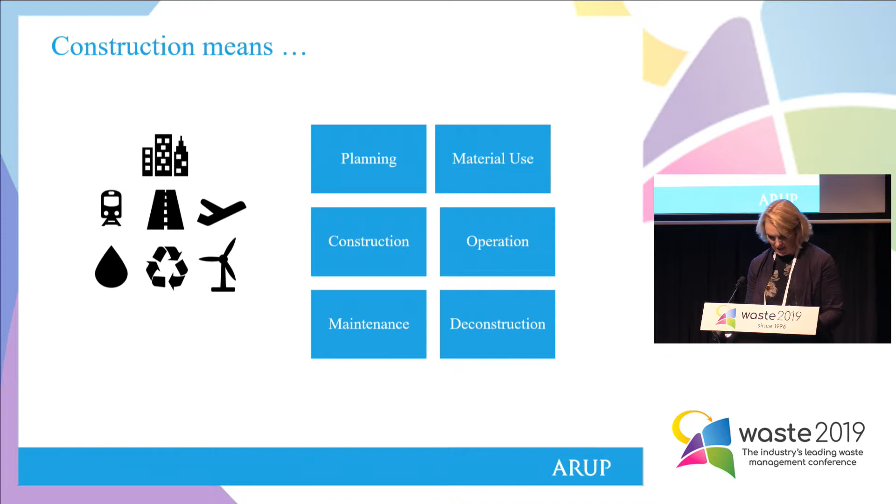This next slide comes from a report that Arup produced with the MacArthur Foundation. When we think about the take, make, dispose approach, it results in the construction sector being one of the largest consumers of resources and raw materials in the world, and a major producer of waste and carbon emissions.

Some key reference figures for the built environment: 10 to 15% of all materials are wasted during construction, and I think that's a conservative figure. We don't use about 40% of our office space, so we have huge wastage within buildings themselves. We could be conserving so much more energy if we thought about smart usage of buildings. Globally, only about 54% of demolition materials are landfilled, and a huge amount go to landfill.

We saw this morning the figures for construction and demolition waste across Australia. It varies from state to state. South Australia has landfill bans and does fantastically well, in the 80s. Queensland, where I live, is really trying to get to 50.

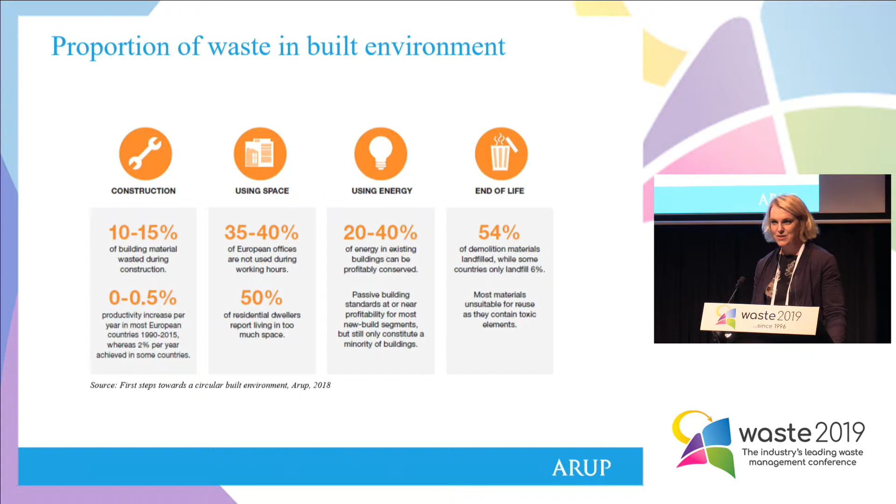So we know that the construction sector is having huge impacts on the environment, and organisations like the World Economic Forum are starting to bring this to light. They're also recognising the opportunity that the circular economy can bring to the whole area of material usage.

We've seen these slides a number of times today. Rosanna had it earlier for the EU, and Natalie showed it earlier as well. But the UN Sustainable Development Goals are really recognising the fact that we only have one planet, one Earth, and we have to think about how we are using it.

Last week, the EU released some interesting stats when they refocused around climate change and material usage. The EU themselves are using about 3 to 3.5 times more resources on a per capita basis. Luxembourg, one of the richest nations in Europe, on a per capita basis has theirs used up in 48 days. So particularly in the developed world, we are using more than we are producing, and this is not sustainable. If we think about how much more infrastructure we need to build over the next 35 years, it just can't be done if we continue with the same approach we have taken to date.

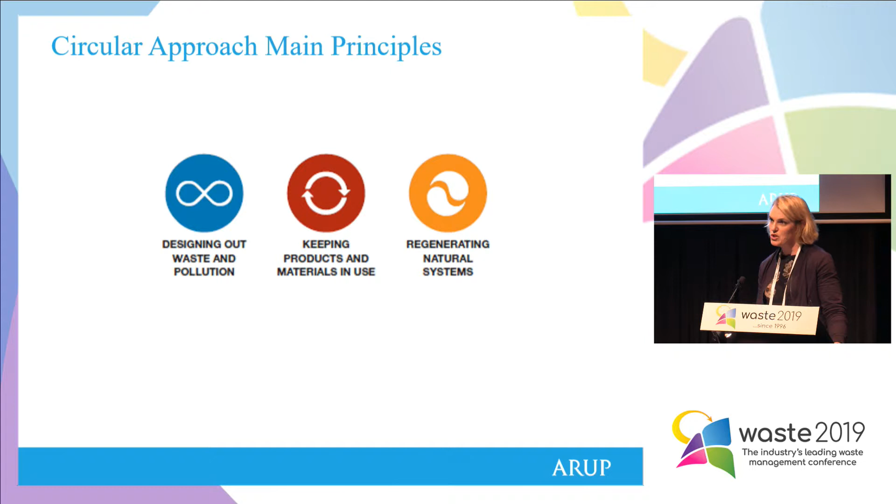When we think of the circular economy, the key principles according to the MacArthur Foundation are designing out waste and pollution, keeping products in their cycle as long as possible, but also regenerating natural systems. When we look at this publication that Arup produced last year with the MacArthur Foundation, a number of these are then apparent with regard to the built environment.

This report focused on the viewpoint of the circular economy from principles to practice from three key actors. It looked at it from the position of policymakers and governments, from investors and bankers, and then from people who actually build the construction, so developers and the construction sector themselves. They came out with some core circular economy functions that need to be embedded into the circular economy and the built environment.

So things like supporting human well-being and natural systems, maintaining continuous material cycles, and then integrated infrastructure systems. I'm aware that we need to get through a bit, so I'm going to continue.

So I'm going to the problem, that's sort of where we're at, and I just thought it would be useful now to talk you through what are the opportunities and some really good examples that are happening across the world with regard to circularity in the built environment.

First of all, we've got circularity at infrastructure scale, and we have HS2 in the UK, which is High Speed Rail 2, and that is being designed to total circular principles. So at all times they are thinking about material usage, design principles, and reuse principles through the whole design process and the construction process for HS2.

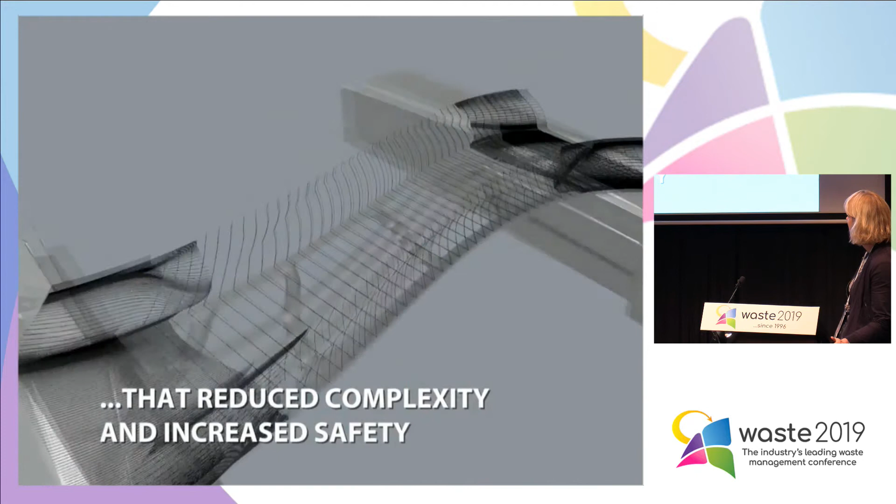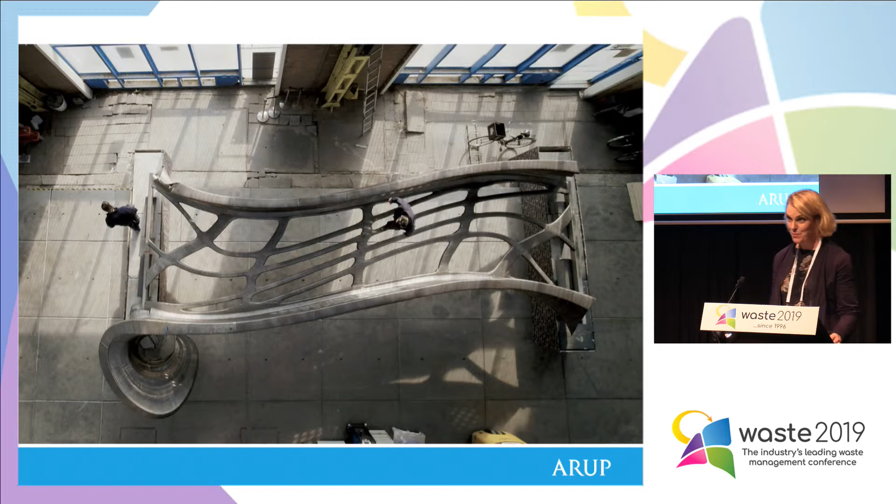So that's where it's at. Arup were co-designers on that project, and it has actually been installed at this stage. So it's a fantastic future example of where we can go with modern techniques.

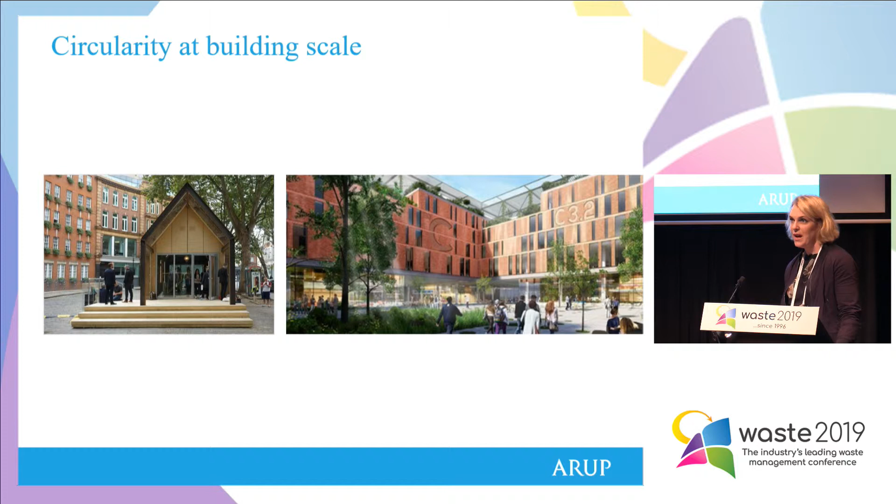Then when we look at circularity at building scale, there are some really interesting examples with regard to this. The first one is actually the circular building, which Arup designed as part of London Design Week a couple of years ago. And then the other one is the Sky building in the UK, which is 90% timber.

When we look to the circular building, which Arup designed as part of London Design Week, it was a really interesting challenge, because one of the things we had to do was look at leasing materials rather than purchasing them, maximising off-site fabrication. We really wanted to select materials that were reused, remanufactured, and could be recycled. We need to avoid things like wet trades, because we need to think about its deconstruction as well as construction.

Designing the fit-out so that it could be interchangeable, it could have multi-usage, and in terms of its electrical system, it needed to be low voltage and off grid, facilitating future flexibility and ease of maintenance in design.

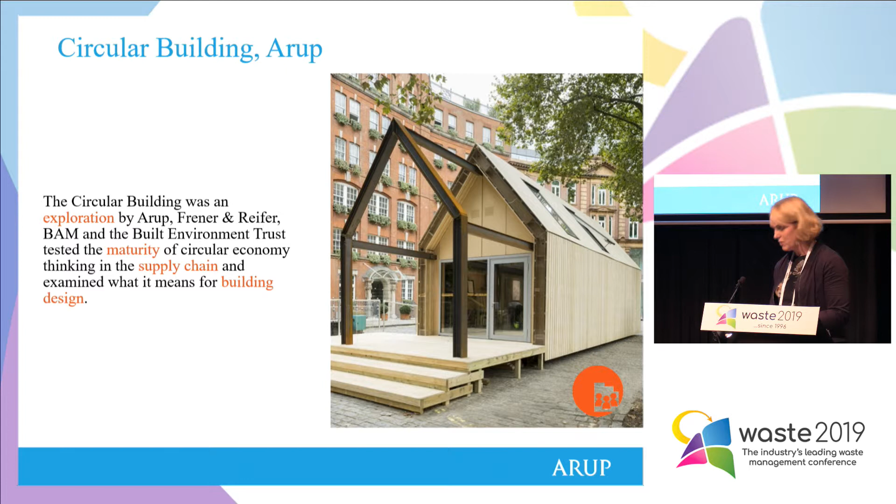It was highly successful, but the biggest challenge of the whole building, when we took it down at the end of Design Week, was actually getting the materials back into the supply chain. That was challenging because the supply chain, in a linear model, did not allow it to go back. So that was a fantastic example of what can be done in terms of construction and deconstruction, but the reuse is what was really challenging with regard to it.

Just in terms of the building—sorry, I'm losing my pages, it's all confused—this is the Sky building in the UK, which is in London.

It's a flexible workspace delivered in under a year, so really quick construction, owing mainly to prefabrication techniques and renewable sources of energy. It uses low VOC materials and has significant carbon savings. Internally, it's got huge adaptive fittings, creating lots of flexible spaces for maximum reuse.

This is a future concept proposed in Tokyo, which is actually going to be a wooden skyscraper. The idea is that 90% of the building will be made out of timber and 10% steel. So in terms of carbon footprint, it basically has a zero carbon footprint because of the use of timber.

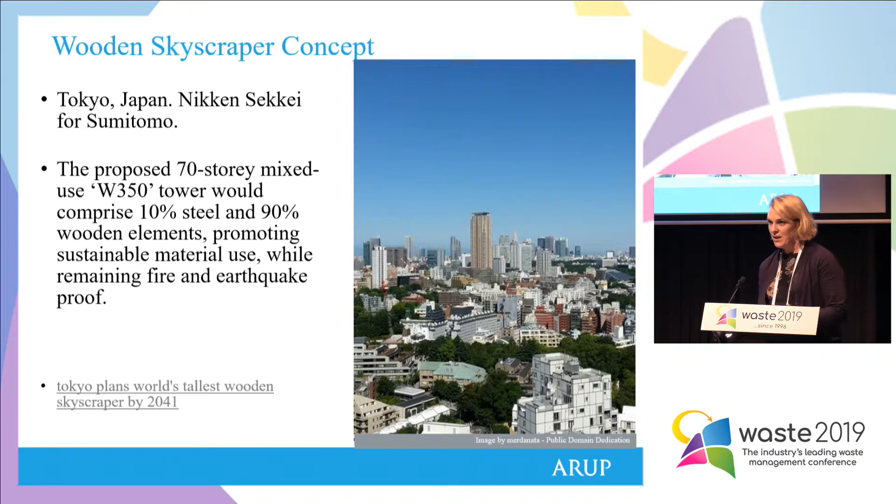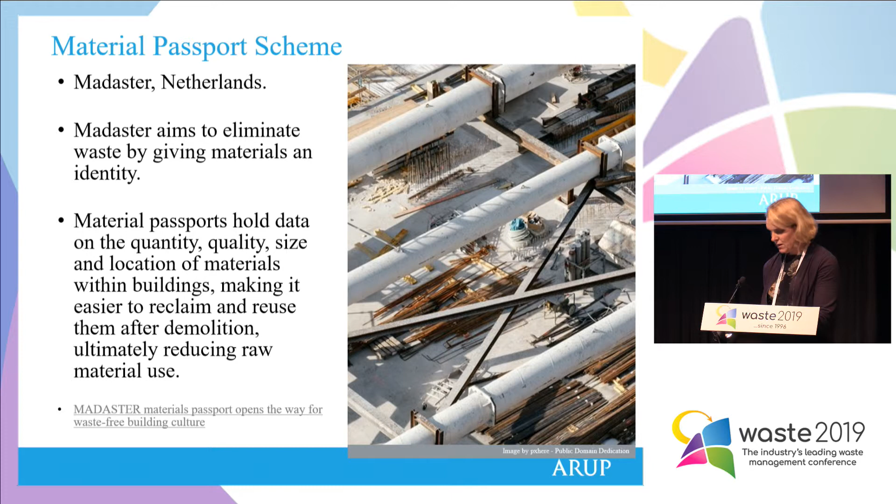So that's all for buildings. Then when we look to circularity at community scale, there are some really cool examples even in Australia. You've already heard from Darren this afternoon on the Yarrabilba project in Queensland.

One of the key ideas is actually shared ownership. So you wouldn't buy a 3-bedroom apartment, the idea is you would buy an opportunity to live in this master plan through your entire life, and be able to morph into different houses and buildings and homes that would adjust to your needs as you go through. You might start off on your own and get a studio, then you get married, you get a 1-bedroom, have 3 kids, you get 3 bedrooms, they go to uni and hopefully disappear, you go back to maybe your 2-bedroom, and then maybe end up in a kind of aged care facility. So this sort of idea.

As I said, in Australia we have some really good examples of circularity at a community level. Obviously there's the Queensland Lendlease facility, and then the FKG Group in Toowoomba are proposing to build basically a circularity precinct to support technology. So we're starting to see this come in Australia as well.

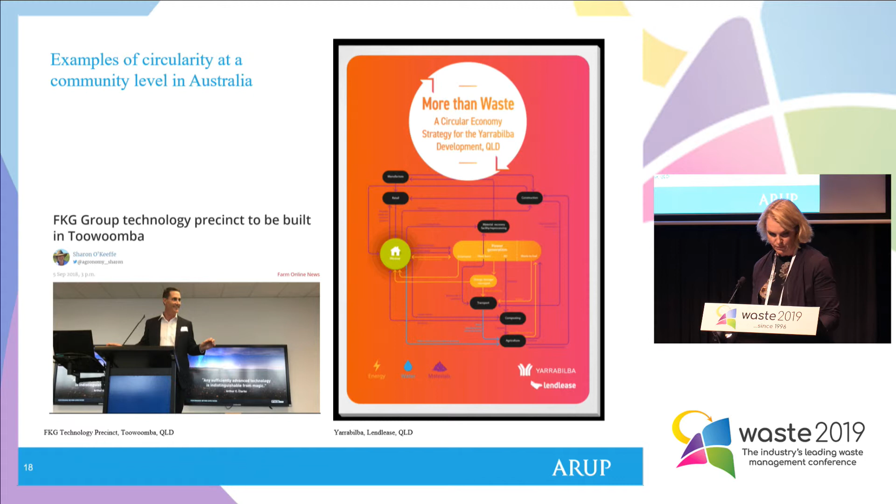Finally, I'm going to talk about circularity at a macro scale, at a much greater level. China is obviously really leading the way in this space, and I'll talk about that in a minute. But more interestingly, most recently there was a Circular Economy Pacific Summit held in Rotorua last month, held by the MacArthur Foundation and the New Zealand Ministry of Environment.

It talked about the really massive opportunity that the Pacific has to embed circular economy principles, first of all because of its full alignment with Maori and Pacifica culture and values, but also because there's a unique set of challenges that the Pacific has that other parts of the world may not be challenged with. Some aspects of a linear economy, particularly things like plastic in our ocean, can have a much greater impact on the Pacific than in other parts.

A lot of the Pacific Island nations have their entire economic welfare reliant on the fishing industry. So it's not just about ocean quality or even food security, it's actually economic security for some of these nations.

So there was a fantastic day spent in New Zealand talking about the opportunity it has and the step change needed. My takeaway message was that a lot of the time we talk about the waste aspect of a circular economy or reusing materials, but when you think about it through the lens of Maori society, you really understand the regenerative opportunities a circular economy can bring.

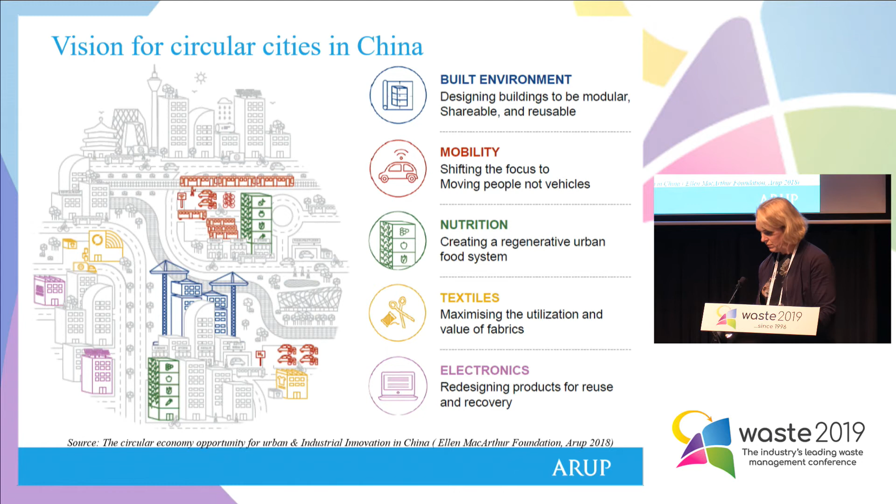The Chinese government have essentially said this can save the Chinese population up to $10 trillion by 2040 by adopting circular principles into the design and functionality of their cities. That's some of the savings they believe they will achieve.

So when we focus down on the built environment for China, what are the opportunities? They have 6 core principles. The first is actually designing for longevity - really embedding things like modular design and flexible design into the original design.

So not designing something for a 25-year life when you can actually design by thinking of its multiple uses for a longer period, and understanding what materials you will use and how that will impact your use of the building.

Industrialising construction processes - by 2026, China wants to have 30% of its buildings prefabricated. They're also really pursuing the whole 3D printing space, and they're probably leading the way there.

Utilising space - as I said earlier, we know we're using about 40% of our buildings. So they're driving a lot of policy and opportunities with regard to utilising space and doing that whole sharing space economy. Improving energy efficiency through green buildings.

They're actually doing really well on this - leading the way in some of the major Chinese cities already, and they're expanding that. Enhancing productivity with smart buildings.

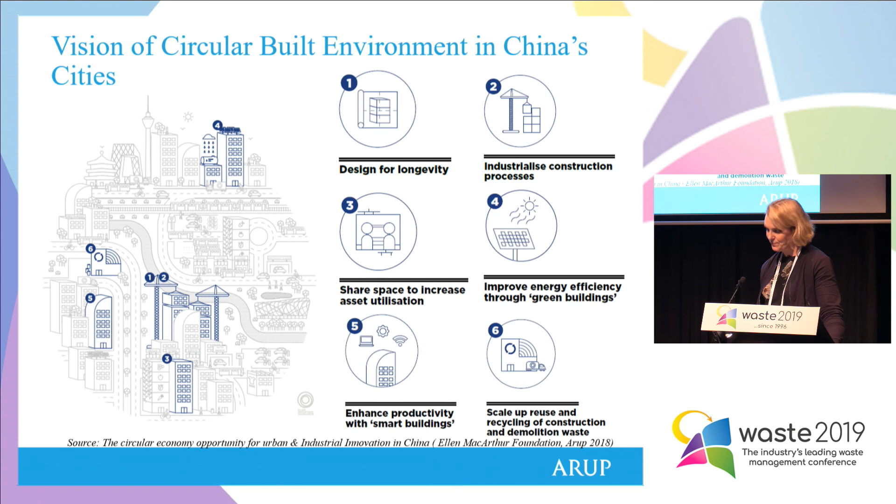Therefore they potentially can generate the most waste. So how do they actually look at making sure that material stays in the cycle as long as possible?

Finally, and I think we heard this very loud and clear, particularly from the industry session this morning, looping back to the UN Sustainable Development Goals - goal 12, sustainable production and consumption, is embedded into the circular economy. But probably fundamentally more important is encouraging partnership and working together, because if we work together we have an opportunity to achieve so much more.